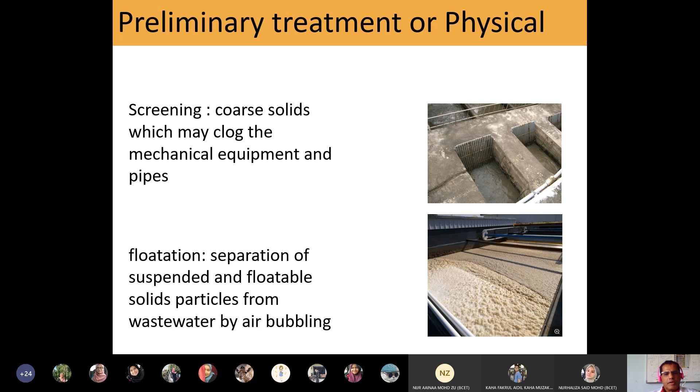We'll go to another process after this, which is called grit removal. It is also screening, but for small things, for example sand, ash, eggshell, etc., with a diameter less than 0.2 millimeter. Okay.

Inorganic, which is heavy concentration, will not be removed here because bacteria are not capable of breaking down the structure of the compounds. Inorganic cannot be broken by biological treatment process. Inorganic means metals. Also concentrated hydrocarbons, organic, will not be broken by bacteria and need to be reduced by dilution or whatever.

Okay. So grit is usually removed in a long, narrow trough called the grit channel, designed to provide a flow-through velocity of 0.3 meter per second. Okay. And settled grit can be removed manually or mechanically. So this is also another way; it looks like filtration, but not as a filter. It is for big scale.

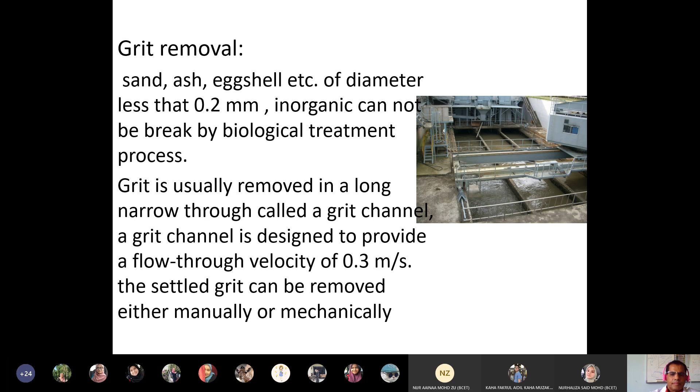Clear? Somehow clear? Clear. Yes, sir.

Clear, sir. Okay. After that it goes for primary settling. Now we are talking about preliminary and primary treatment. As we mentioned in lecture 1, we have preliminary, primary, secondary, and tertiary. Now we are in the first stage, which is preliminary and primary. It means physical separation. We are not talking about chemical. Chemical and biological we will talk about in the next chapter.

Okay, primary settling in suspension. If, for example, you have suspended solid, and this suspended solid's specific gravity is greater than H2O, it will settle down if you keep it for a long time; it precipitates. But if these particles have less specific gravity than water, they will not precipitate.

They will remain forever. Like maybe Salahuddin last time did an experiment; we need to add chemicals, put coagulant, and make mixing. You saw that video, I think. That will be chemical, because we add chemical and small particles and color will gather and then precipitate. Okay. So primary settling will be naturally by gravity. Any particle with specific gravity higher than H2O will precipitate; less than that will remain in the sample.

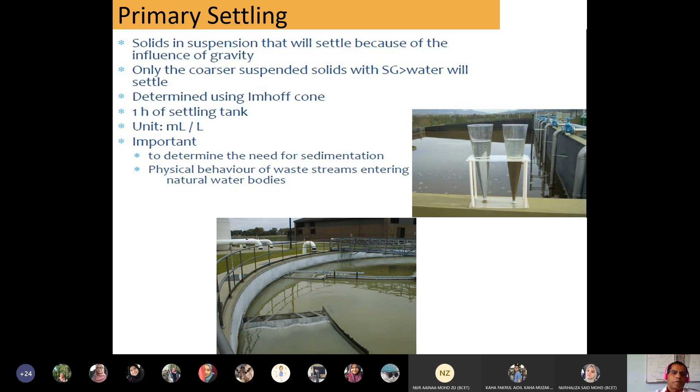Okay. Secondary settling means that we take overflow from the primary, and we will get clearer water. Okay, as you see here. So far, okay.

I am talking very slowly for you. Mashelmie is also there. Mashelmie, okay, boleh? Boleh. If there's a question you can ask. Any one of you can ask. You can stop me and ask.

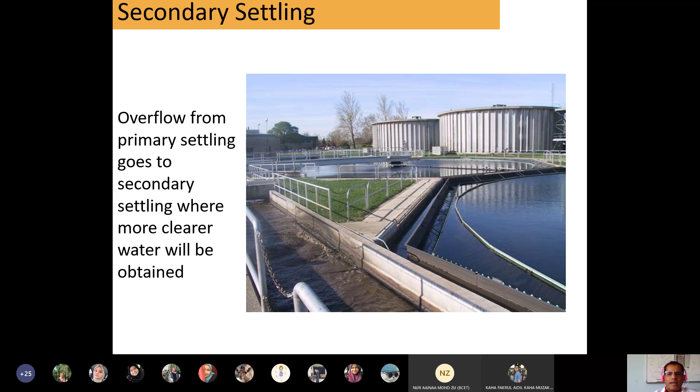Okay, we go to calculation: suspended solid analysis, and that is very, very important for you, because engineers don't understand talking, they understand problems. Okay, where can suspended solid be found? In environmental engineering, solids are measured in drinking water, polluted water, domestic and industrial wastewater, and sludge produced in treatment processes. Okay.

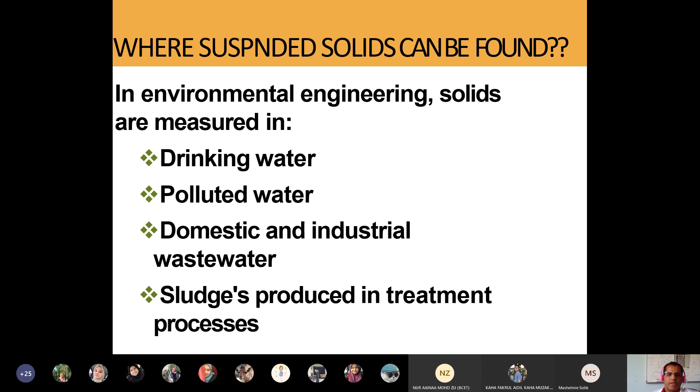Solid classification. For suspended solid, we have 5 categories, not just one, and we will talk about them and how to make calculations for each of them. Now we are not talking about big size. Big size we already removed by screening, grit removal, and flotation. Now we are talking about minute particles in the sample. We call it suspended solid. This suspended solid usually has 5 different categories.

We have total solid. Total solid will be all solid in the water sample. We will understand with problems how. Total suspended solid: what is total suspended solid? And then we have total dissolved solid. What is the difference between both? And then we have volatile solids, and we have fixed solids. I think in pollution control, we talked a bit about this. We gave one problem, but here we will try to make it clearer with maybe many problems. Okay.

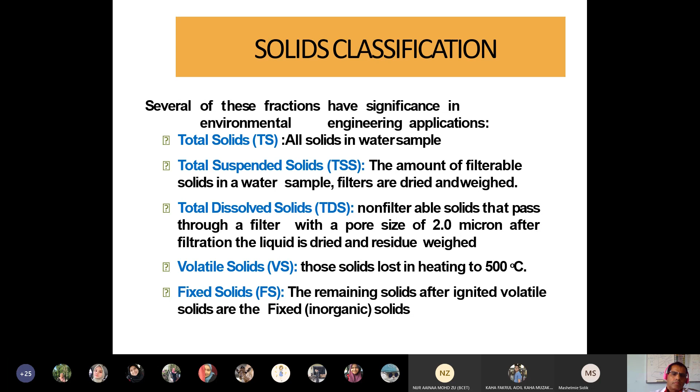We go to the procedure, how we measure the total suspended solid. It's very easy. I think you are all familiar with this flask, and then we put the sample, and then we go for filtration. This is the filter we put here. I think all of you have done this before. And here is the vacuum. After we apply vacuum, clear water will come here. Dissolved ions will go through; suspended solid will be filtered here.

And then we take this filter to the oven at 103 or 105 and make drying. So here we remove H2O from the suspended solid. Okay. And then after cooling down, we put it in the desiccator to remove any moisture, and then we take the weight. Okay.

After we take the weight, we go for ignition. Ignition will not be 105, it will be from 550 degrees to 600 degrees. It means high temperature. In this process, we remove something called VOC, or volatile organic hydrocarbons. These volatile organic hydrocarbons cannot be removed at 105 or in a drying process. We need to do ignition. This is sometimes 15 minutes, sometimes 30 minutes, depending on the sample, okay?

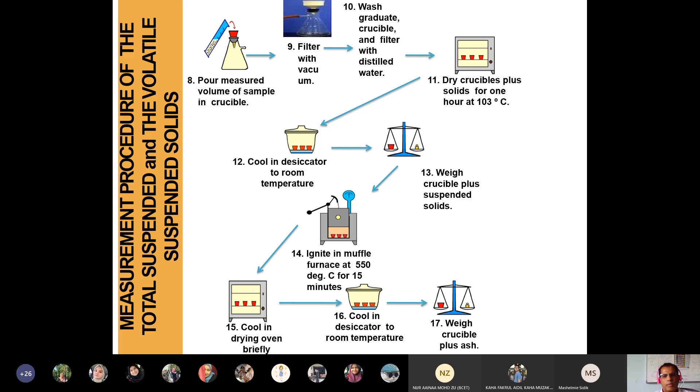Understand or no? Understand. Daniel, understand? Yes. Okay. Sulaiman tak ada, Sulaiman mana? Sulaiman has a problem with access, huh? Muhammad Ali ada. Muhammad Ali ada, yeah. I think most of you are there, but tell your friends that I will keep this so they can watch any other time. And for you also, if you don't understand, if you go back to this, you will understand more, inshallah, no problem.

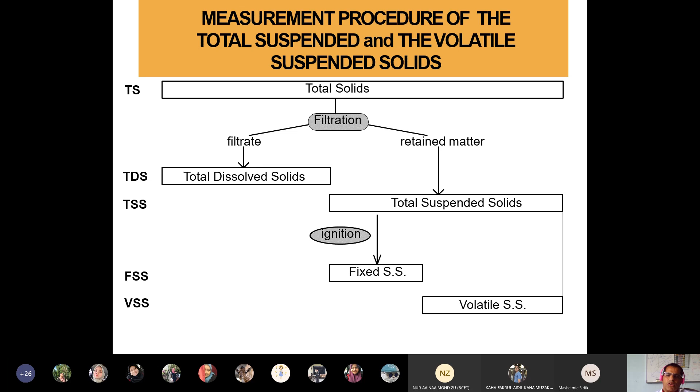Okay, we go to the flow chart. The previous slides made a flow chart here. You see this is total solids, and we do filtration here. In the filtration, we have filtrate. This means the water coming from the filter. This is suspended solid, remaining. This will be wet, okay? So here we have total dissolved solids, and this one we have total suspended solids. After that, we do ignition. We go for fixed solid, and from here will be volatile suspended solid. This is the summary of the previous slides.

I will skip this one, but what is total solid here? Total solid of the sample is the matter left behind after drying a sample of water at 103 to 105. The residue remaining upon evaporation, that will be total solid. All matter except water, after the drying process. Metal salts, inorganic salts, organic material, insoluble salts, soluble salts, etc. All this will be in the total solids. See, organic material will also be there, but after ignition, these organic materials will be removed. Okay, understand somewhat, sikit?

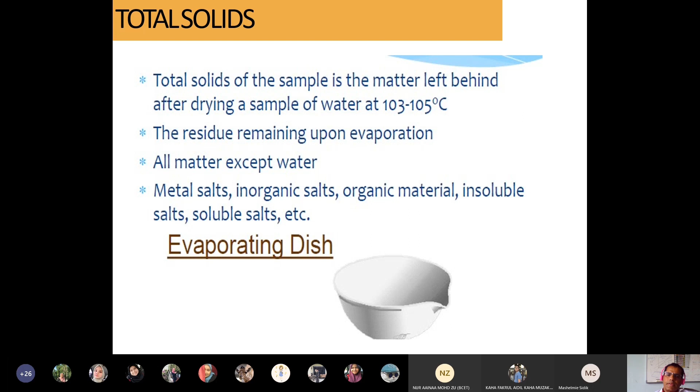Total solid: there are two ways that solid material may be classified. We have suspended solids and dissolved solids. Dissolved solids will be ions, like last time, calcium ions, magnesium, potassium, all these will be dissolved. Volatile solids: this volatile refers to VOC or volatile organic compounds. And fixed solid will be what remains after drying and after ignition, meaning silica, aluminum oxide, all other minerals that cannot evaporate at 105 and at 600 degrees C. Okay.

What is suspended versus dissolved? Total suspended solids are the part of the sample that may be caught within a 0.45 micrometer filter. This I think you did last time. I remember some of you did the experiment on how to remove suspended solids and how to weigh and measure. And total dissolved solids are the part of the sample that will pass through the filter. In drinking water, mostly dissolved will be inorganic salts, dissolved organics. And these dissolved ions will be hardness. In pollution control, we calculate hardness based on calcium and magnesium.

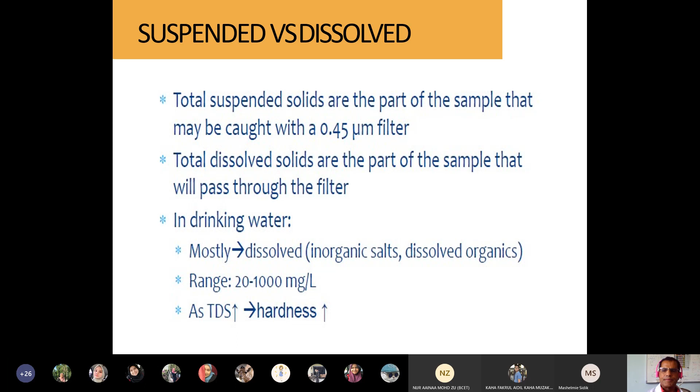Okay sir, this is a filtration apparatus. You are very familiar, we have here the funnel. We put in the funnel this filter, and then by vacuum we take it, and after that we take this filter and make drying, and we take a crucible usually for ignition. Why ignition? Because the crucible can stand high temperature, not to be melted at high temperature. And the difference in weight, we calculate that for the 5 different elements we talked about before.

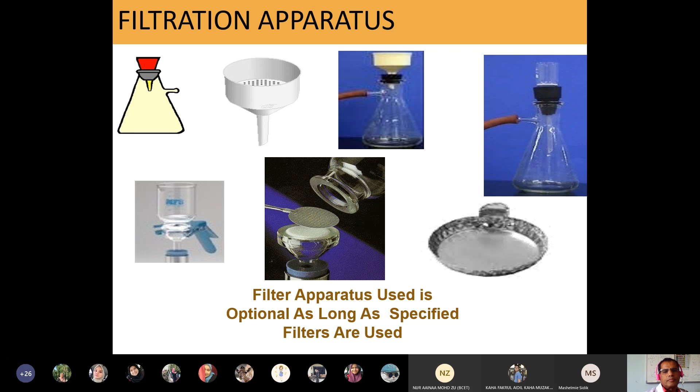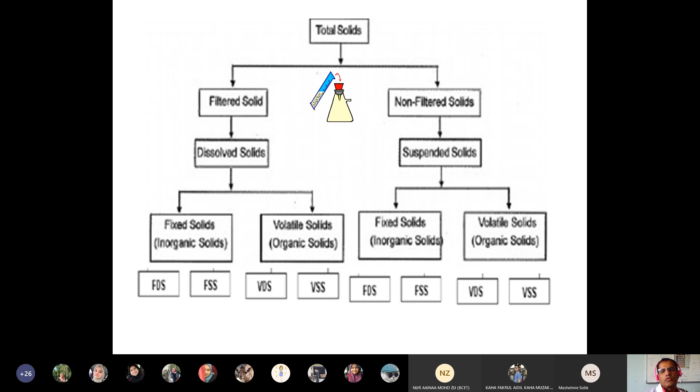This is also the same. We have all categories you see here, but this is more clarification about how to get total solids from filtration, and after that filtrate, non-filtrate, suspended solids, dissolved solids, and so on and so forth like before. This is just extra for clarification.

Volatile versus fixed. Total volatile solid is the portion of the sample lost after the sample has been heated to 550 or 600 degrees, sometimes for 15 minutes and sometimes for 30 minutes. Both are okay. It is an approximation of the organic material present.

What is the importance of this organic material in waste? Maybe, if we are talking about marine species, when there are organic compounds in the sea bottom sediments, bacteria will be very active and consume all the oxygen in the water. So nothing is left for plankton or fish. This is why sometimes in the seashore we see many fish die because of what we call eutrophication, or red tides, meaning lack of oxygen in the water because of bacteria consumption.

Because if we have phosphate, nitrate, hydrocarbons, then bacteria are very happy to have all kinds of food. So they try to utilize all the food, and at the same time consume all the oxygen in the water. We will talk about this in chemical also, how to calculate theoretical oxygen demand, like we did in pollution control last time. We will elaborate more, but this is a very important factor for the quality of marine environments, especially seas and rivers.

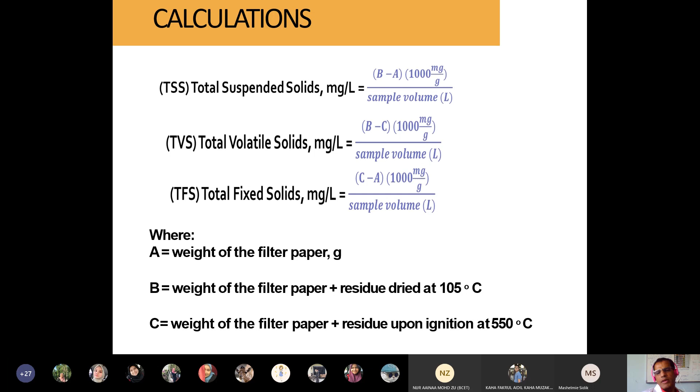If you understand this, then all problems of physical will be very, very easy. We'll see how.

What about total suspended solid? It will be the weight of the solid multiplied by 1000, divided by sample volume. Weight of the solid will be in grams, of the crucible dish minus weight of the crucible, and this will give you the weight of the solid. Because usually when you weigh, you cannot weigh the sample alone, you have to weigh it with the filter or with the crucible. You cannot separate it; if you try to separate, you will get error. Understand?

So you weigh it all, and then you take the balance. You take the weight before you do your experiment. You take the weight of the filter or the crucible, and based on that you can find out how much the real weight of the sample is.

More details on how to calculate and prove that 1 ppm equals 1 milligram per liter will be on page 43 and page 44. You will see this in detail. We will go together for that after this.

Total volatile solids will be the weight of the volatiles. How do we calculate the volatiles? We said that dry sample after drying minus after ignition will give you the volatile solids, how much was removed.

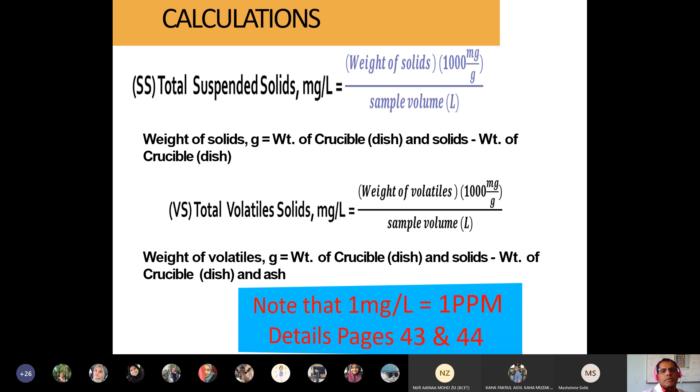All right, we go to one problem to make this more understandable. The problem says calculate suspended and volatile suspended solid in milligram per liter. Milligram per liter means 1 part per million. Given the following data, you have sample volume in milliliters, so you need to change this to liters to get part per million.

Weight of crucible you have here in grams, you change this to milligrams. Weight of crucible and dry solid, also in grams, you need to change. Weight of crucible and ash, also in grams, you need to change.

So to calculate suspended solid in milligram per liter, it will be dry solid in gram divided by sample volume, multiplied by 1 million. Why 1 million? Because I change milli to liter, so I need to multiply by 1000, and gram to milligram, I need to multiply by 1000. Together that will be 1 million.

I think you are familiar with this unit change, how to change from one unit to another. You studied this in elementary principles. But if, especially for foreign students, you don't understand, I will explain more, inshallah, no problem.

So dry solid will be, we said, crucible and dry solid minus weight of crucible. This will be here, divided by sample volume which is 25 milli, and this milli I change to liter.

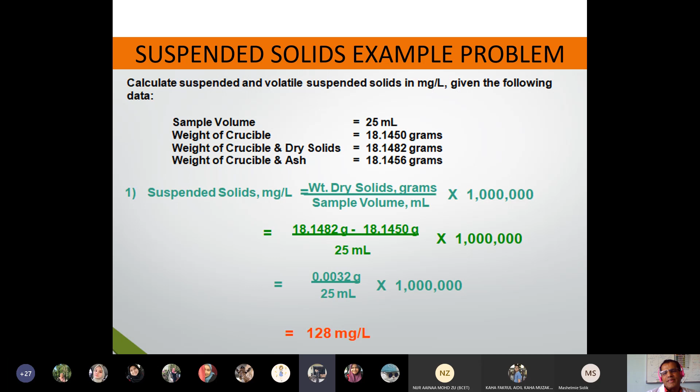Okay, is it clear here or not, how to calculate? Any questions here? You are sleeping. You are tired, sleep, nobody? No sir, no sir, we understand. Some of you are sleeping, yeah? Okay, okay.

Here's another problem, the same problem, but we need to calculate volatile suspended solid. How do we calculate it? We calculate it by volatile solids in gram divided by sample volume. Volatile solids will be...

18.1482, this one. Crucible and dry solid minus crucible and ash - this is after ignition at 600 degrees Celsius. So I will get the value here, divided by sample volume, multiplied by 1 million, and I will get the answer: 104 milligram per liter, or part per million.

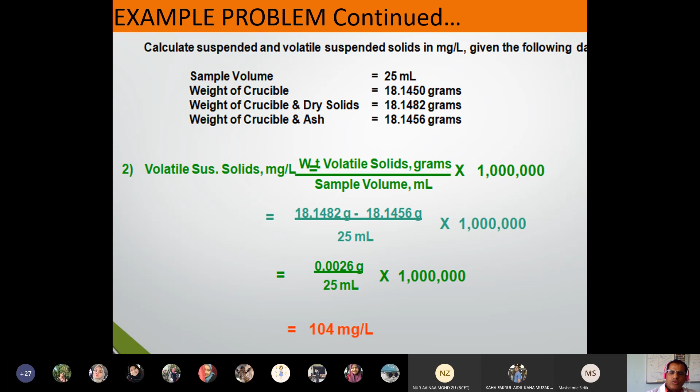Okay, maybe one example is not enough, you need to know more, so we go to another exercise. We have another problem. It says calculate suspended and volatile suspended solid in milligram per liter, given the following data.

We have here weight of crucible, you may see here all in grams, so we need, when we calculate, to convert to milligrams. Weight of crucible and ash, and then volume of the sample. We need to calculate suspended and volatile suspended solids. How do we calculate suspended and volatile solid?

We apply the same formula. Dry solids will be crucible and dry solid minus weight of crucible only, divided by total volume, and then multiplied by 1 million. I explained why 1 million before. Hopefully you can follow, and then you will get the answer in milligram per liter.

Okay, we go again, how to calculate volatile suspended solid for the same problem. We take the volatile solids, how much? How to calculate volatile solids: crucible and dry solids minus crucible and ash, this one. So divided by total volume, multiplied by 1 million, and I will get 76 milligram per liter.

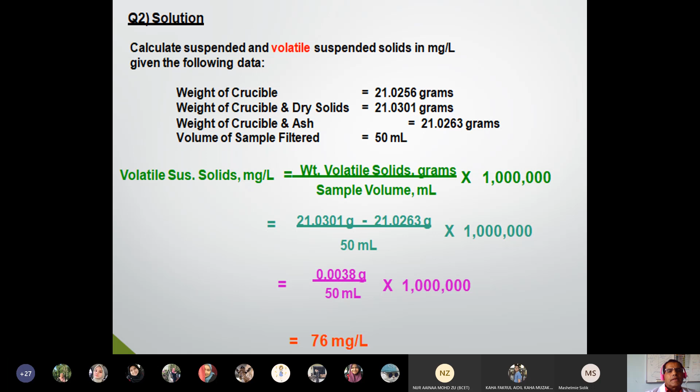Okay, this is the second exercise, hopefully you understand. We go to one more problem, practical problem 3. We have the following data here, the weight of the dish written here in gram, and we have 100 milliliters of the sample.

If sample given in liter, then no need to change. But since it is in milli, then you need to change to liter. Here, dish and dry solid given, and after ignition at 550 also given. Find total volatile and fixed solid.

If you see the process: this is the sample, wet sample after filtration. You go here, you make drying. So here, removal of water, you will have dry sample. Here you make ignition, you remove all organic compounds, and what remains is called ash. This ash will be mainly silica, alumina, something like that.

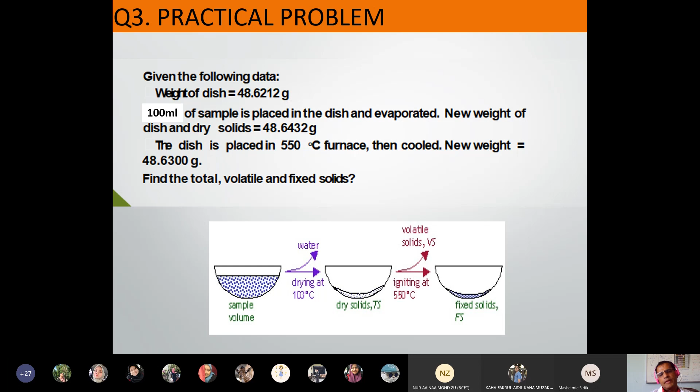How to calculate total solids? Total solid will be dish plus dry solids minus dish, and you will get this amount. But here you see he used gram, so answer will be gram per milliliter, no change of unit. If you want to change, you need to multiply by 1 million. So if you multiply by 1 million, you will get 220 milligram per liter. If you want milligram per milli, then you multiply by 1000, you will get 220 times 10 to the power minus 3.

How to calculate fixed solid? Dish plus unburned solid minus dish. So here dish and unburned solid will be here. This is the dish, divided by sample volume, and here multiply by 1 million. So you will get 88 milligram per liter.

How to calculate total volatile solids? Total volatile solid will be total solids, 220, minus total fixed solid, 88. So you will get 132 milligram per liter. Any questions so far?

Question? No. No, sir. No. So far, so good. No questions, clear, somehow okay. Shuhada, are you from polymer, right? Yes sir. So you understand a little or no? Yes, I understand, somehow can. You can answer all assignment and all questions. Inshallah, okay.

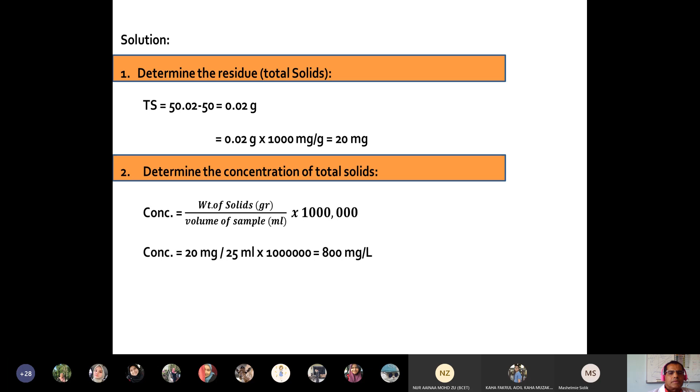If I want to calculate the fixed solid, then it will be total solid minus volatile solids: 800 in the previous one, minus 600, this one will be 200 milligram per liter.

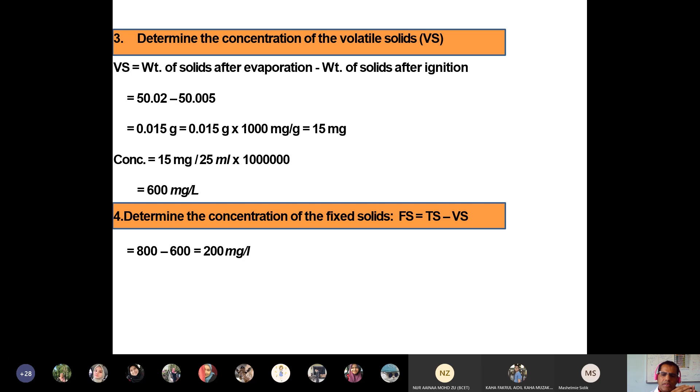So if you memorize the formula for assignment, no need to memorize, just understand. You have filtration, the filter contains wet sample. You make drying, you remove H2O. You make ignition, you remove organic compounds. What is left? We left only ash. Okay, hopefully you understand.

Volatile solids in wastewater. If wastewater, especially industrial, contains volatile solids in the organic portion, like short chain fatty acids, ketones, and aldehydes, they are lost during evaporation. So solids measurement does not give an idea about organic content, because these volatile organics are lost during evaporation.

You don't know what kind of organic. Is it, for example, benzene, aldehyde, ketones? It tells you there is organic, but you don't know what kind of organic materials. If you want to know what type of organic materials, you need to make analysis. Maybe use HPLC, maybe use UV. If you are talking about heavy metals, you need to use atomic absorption. For organics, for polymers, they also use infrared for organic compounds.

And if you have standards, you can make a comparison, and you get the exact values of the hydrocarbons. But when we make this process, evaporation only at 600, you cannot estimate what kind of organic compounds evaporate. You know the total, there are organic compounds, but you cannot understand what types. You need to make further analysis. Okay, clear?

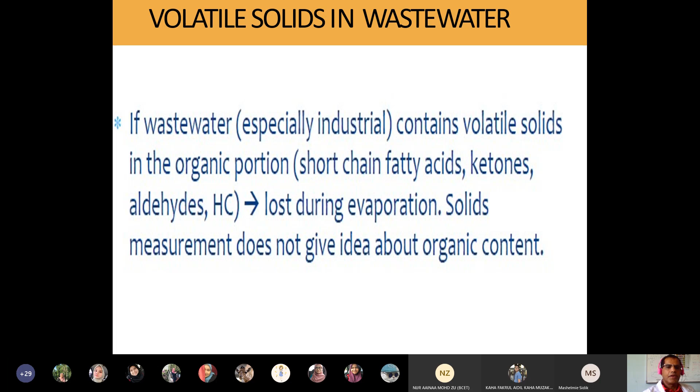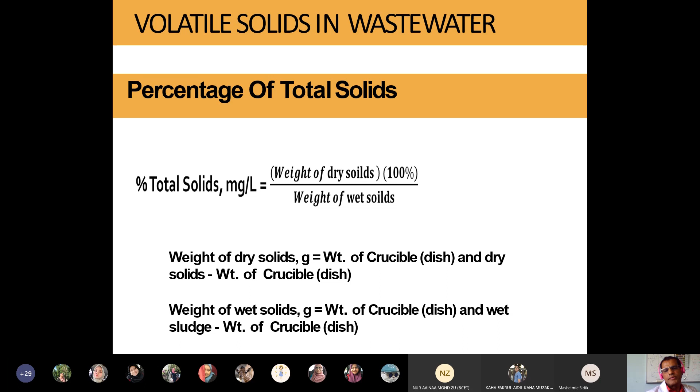How to calculate percentage of total solids? I take weight of dry solids divided by weight of wet solids. Because I am talking about percentage, if here gram and here gram, multiplied by 100, no problem, because I am not talking about concentration. If concentration, I talk about milligram per liter. But here percentage, so it could be gram per gram, pound per pound, kilogram per kilogram, whatever, because this will cancel. So I have only a ratio. Hopefully you understand.

Okay, I will skip this one. We go to the problem. Calculate the percent total solids and percent volatile solids of a sludge sample given the following data. Weight of the dish given in grams. Weight of dish and wet sludge given here in grams. Dish and dry sludge given here also. Dish and ash also given.

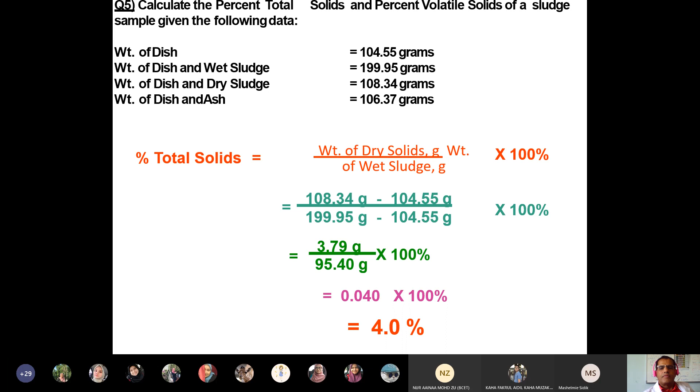So here, weight of dry solids, how much? I can calculate from weight of dish and dry sludge minus weight of dish, divided by weight of wet sludge. So it will be 199.95, this one here, dish and wet sludge, minus also weight of the dish. If it is gram and gram, no problem, because the units will be cancelled, and multiply by 100. So I will get the value here, finally 4%. If I go to volatile solids also, it will be the same. I follow the equation and multiply by 100, and finally I will get 52%. Okay.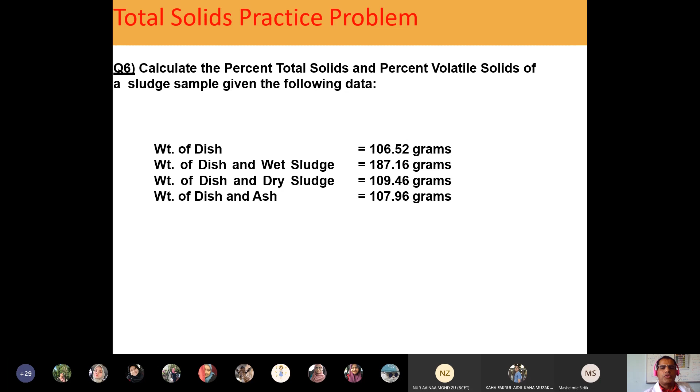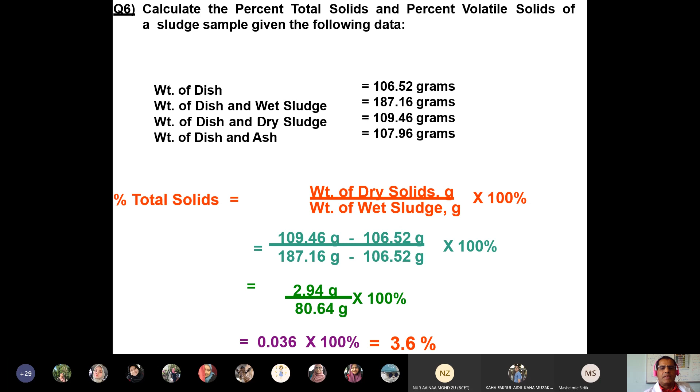Here also another problem: calculate the percent total solids and percent volatile solids of a sludge sample given the following data. I will not read because the data is already here. We go to the solution. Total solids will be weight of dry solids divided by weight of wet sludge multiplied by 100. Similarly here, 109.46, this one dry sludge, minus weight of the dish, divided by dish and wet sludge minus weight of the dish, multiplied by 100. I will get 3.6%. If you want to calculate volatile solids, you can calculate it the same way as in the previous example. Can you do it?

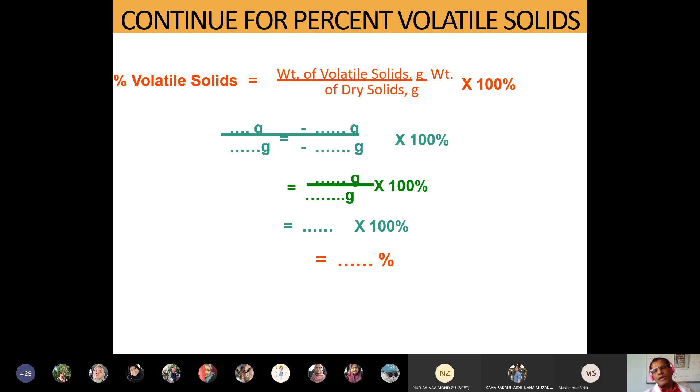And drinking water usually contains positive and negative ions, as you know, we studied before in pollution control. If you buy one bottle of mineral water from the market, and you buy drinking water, you will see that the sweetness of drinking water is better than mineral water. Why? Because mineral water contains some minerals they add, and the cost of mineral water is a little bit higher than drinking water, because they need to calculate the minerals needed and add the suitable amount needed for our bodies. Therefore, the cost will be a little bit high.

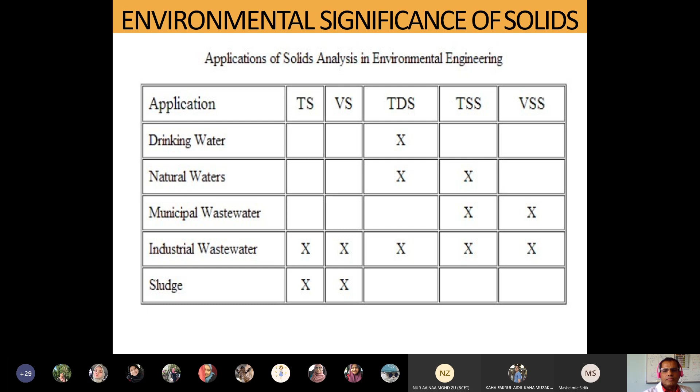I will prove to you that 1 part per million equals 1 milligram per liter. For example, if I have 1 milligram of contaminants in 1 million milligrams of pure water, this means 1 ppm. So part per million means 1 milligram of contaminants in 1 million milligrams of the solution, whether it is water or whatever, that will be 1 ppm.

If I assume it is pure water, as you know, the density of water equals 1 kilogram per 1 liter, or 1000 kilograms per 1 cubic meter. I think you know this. So if I weigh 1 liter of pure water, it will give me exactly 1 kg. If I weigh 1 milliliter of water, it will give me exactly 1 gram. Okay.

So how to prove it? I want to change this milligram per liter. I want to make it milligram divided by 1 million milligrams. That will be 1 ppm. How to change this liter to milligrams? First of all, I will assume it is clean water. So 1 liter will equal 1 kilogram. Is it right or wrong?

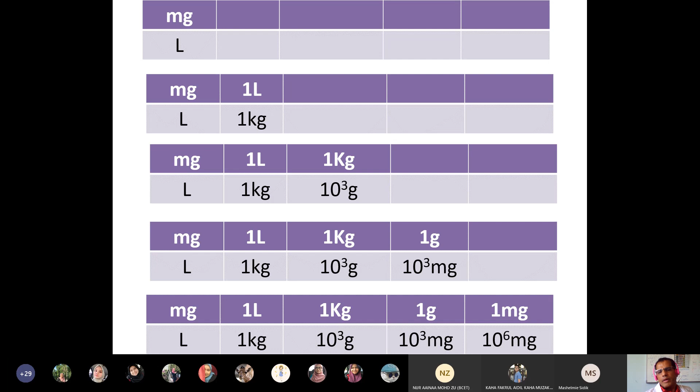So here, liter will cancel with liter, kilogram will cancel with kilogram, gram will cancel with gram. What I will get here is milligram, and 10 to the power 3 multiplied by 10 to the power 3 gives 10 to the power 6. So 1 milligram divided by 1 million milligrams means 1 ppm. Okay, is it clear or not?

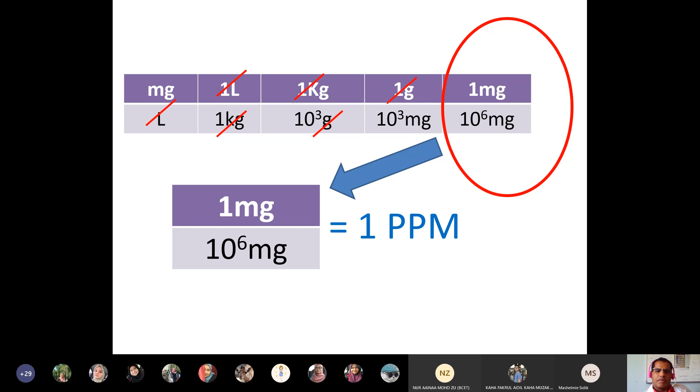Faham, tafaham, you are sleeping, wake up. Faham sir, faham. Faham, sir. Faham, sir.